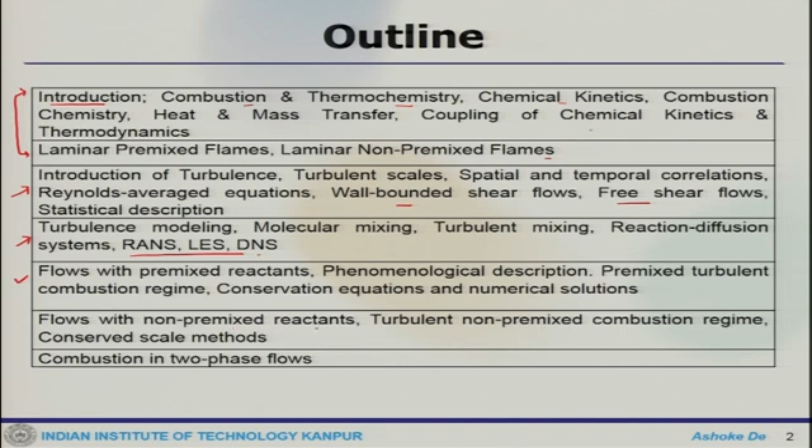We will look at some basic aspects of turbulent combustion, then move to premixed flames, then non-premixed flames, and see how different aspects of premixed and non-premixed flames are modeled based on their theoretical basis. At the end we will touch upon some advanced topics, or topics in two phase flows, or combustion in two phase flows, which are quite different.

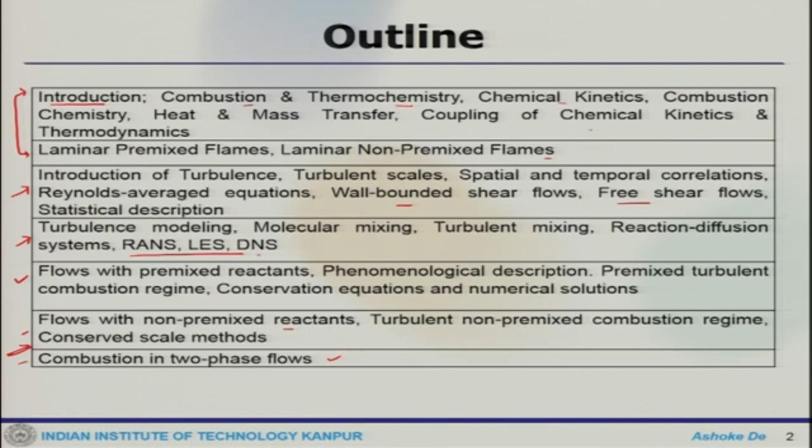Up to this point we are discussing everything in the gaseous combustion mode, and then we move to the last topic where we will talk about two phase flows or combustion in two phase flows, where sprays, atomizations and all this would be discussed.

Some of the materials covered in this course are taken from different references, and wherever possible we are giving the reference where it is taken from. One is also free to read any other books. First two books are essentially on turbulence, then there are books on combustion and turbulent combustion, and some online lectures were also looked at for different aspects of this.

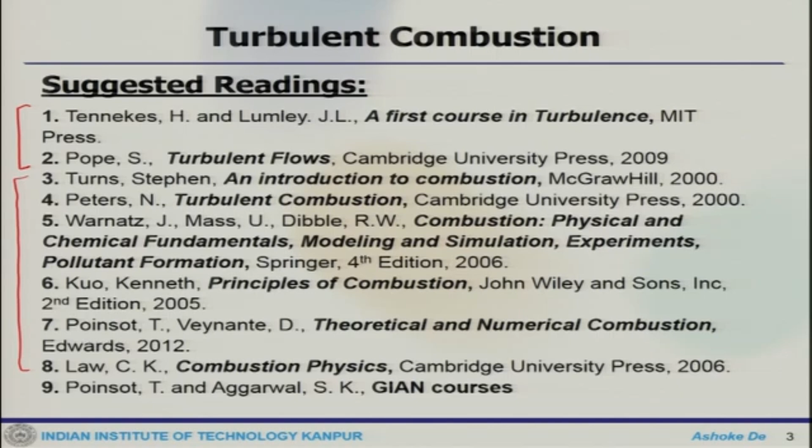This will actually talk about the complete aspect of turbulent combustion, and at the end of the course I hope you will have enough idea about turbulent combustion, how the basics of turbulence and turbulent combustion are connected with each other, and their modeling aspects.

Okay, so now we will start with the basics of combustion.

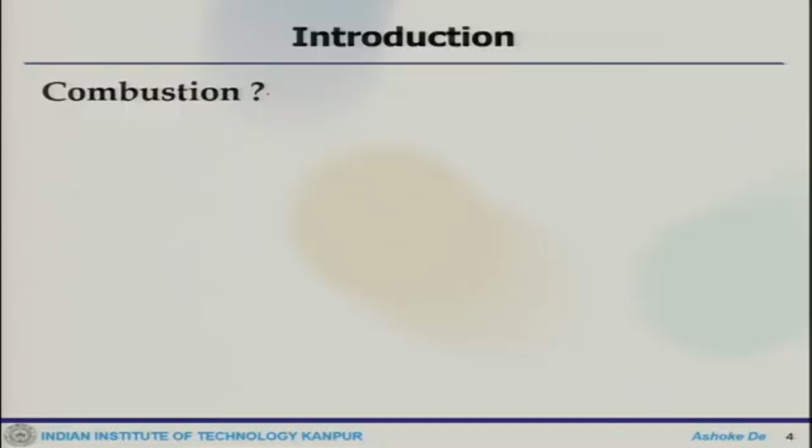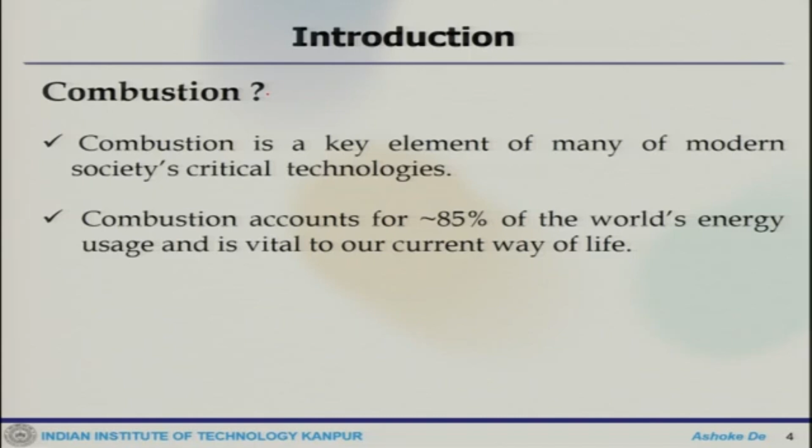So, basics of combustion - what is combustion? That is the first question one may ask. So, combustion essentially, one can think about it as a key element of all modern day or modern society's critical technologies. Because it accounts for approximately 85% of the world's energy use at this moment. So, it is quite important to know what combustion is, how it takes place, and what are the different challenges, and how it actually impacts our daily life.

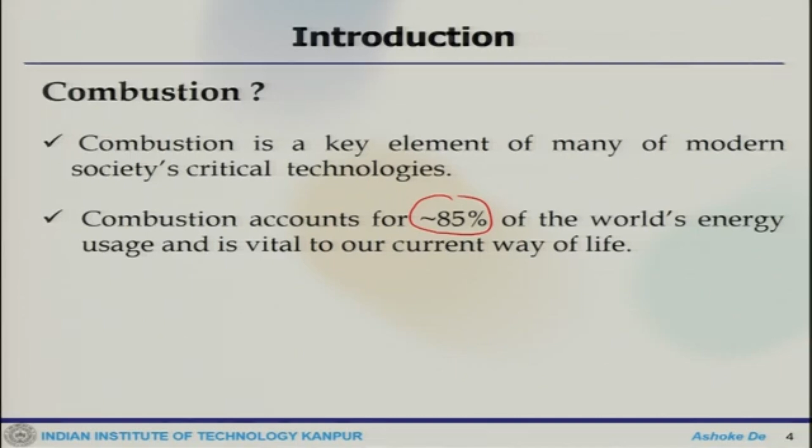And if you think about it from the application point of view, it starts from our daily life, like when we start cooking at our kitchen with gas burners, to our space missions. So, it is a wide range of applications it has, and that is why it is a key component of our daily life even today.

So, you can see spacecraft and aircraft propulsion. Spacecraft means when we talk about launching vehicles like rockets, missiles and all these things. Then aircraft propulsion, which covers both aviation aircraft, civilian aircraft and fighter aircraft. Then you have power production - when you go to the power plant, there is also a huge application of combustion, and we will see as we go along with this the different aspects of combustion and discuss all these details.

Then household application, transportation and different aspects of this. So the whole idea is the conversion of chemical energy to thermal energy or propulsive force. This is the key element of any combustion.

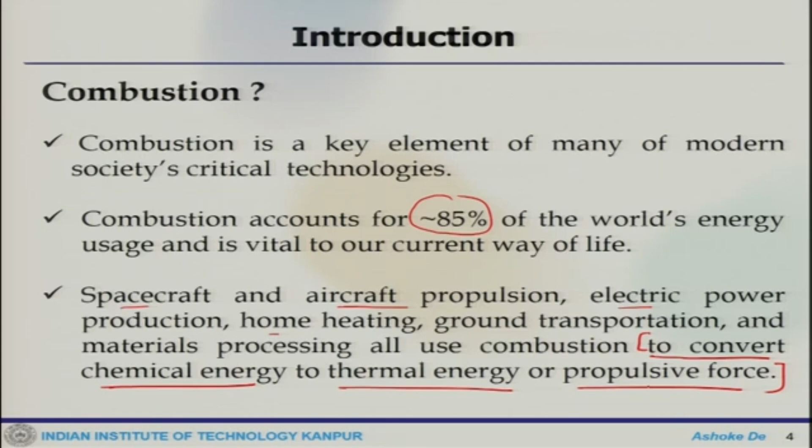Now, as I mentioned, there are different aspects of combustion or different applications. Starting from rocket propulsion, you have gas turbines and jet engines. Here, gas turbine could mean our land-based gas turbine, which is used basically for power production - in the power plant. At the same time, jet engines or aircraft engines also use gas turbines, but the principle of operation is slightly different from each other, and also the kind of fuel they are using. Then you have piston engines.

This is applicable in the automobile sector. So clearly you can see that in daily life, running your 2-wheelers, 4-wheelers and heavy vehicles on the road, they are operated under piston engines. So the power which you generate for the automobile sector also comes from combustion.

So if you see the applicability, then you go to furnaces and boilers. This has an application in material processing industry, especially in the power plant where boilers are used, and also furnaces are used in steel plants and all these things.

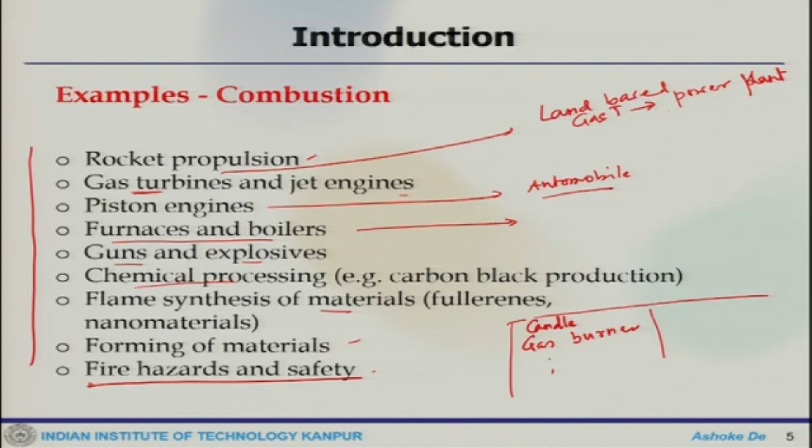One can see why we say that even today, 80-85% of the energy comes from combustion. Now I will take you through some nice examples that will give you an idea of the area of these applications, which is quite a range of applications that one can find for combustion.

This is starting from your gas turbine engine, the aircraft engine. That is the big engine, one can see it has so many components. There is a starting component which is the fan, then it comes to the compressor, then the compressor units, then you get the combustion unit, then turbine and finally nozzle.

There are multiple components associated with this particular unit, but the key element is the combustor, which actually generates the power, where you get your chemical energy transformed to get this propulsive force or thrust force. This force is essentially required to propel this particular engine.

Then you come to an application where you see a nice looking flame like a gas burner. It is nice, calm and nicely looking system.

But at the same time, if you come across here, this is a launching pad of a rocket engine. You see the kind of plume it generates, it is huge. It generates lot of power which sends these satellites to the orbit. That requires lot of power, and that is generated through this reaction mechanism or combustion, which in a nutshell is the reaction of different reactants or species, and they get you back the force.

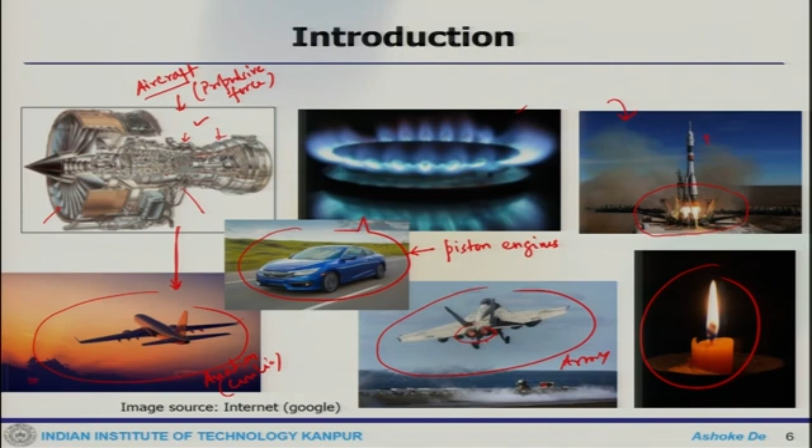And this is a nice example of your candle burning, which is daily life. When your electricity is not there, we can use this kind of burning, a nice calm flame that actually illuminates light. So one of the another aspect of combustion is that it also gets you some sort of light. As I mentioned, it accounts for almost 85% of the world's energy uses.

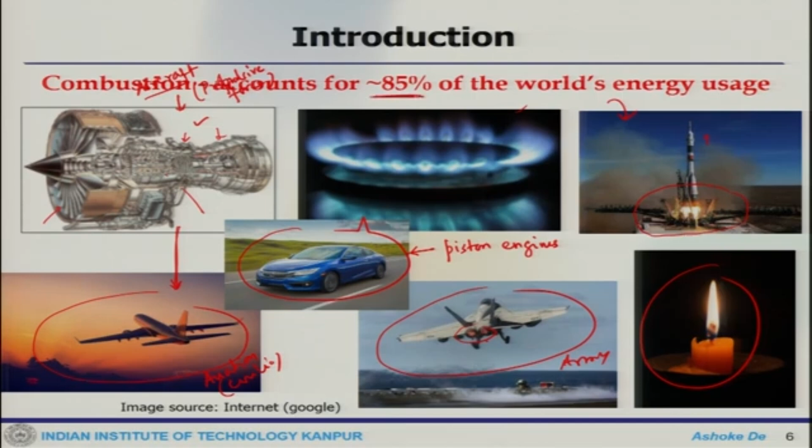Now there are some more examples one can see. This is another example of your gas turbine combustor. This is a very specific unit, just an example, because different gas turbine engines have different kinds of combustors, so their geometry would be different. But this one shows you there is a swirling vane there, then the fuel, liquid fuel, is injected. So this sort of flame you can see instantaneously.

This shows you a big satellite which is launched through the rocket motors, and see the amount of plume that is hitting the deck. So it's coming out as a product of combustion.

There is another thing which takes place in hot days, which is the fire that spreads out over wide range of forest areas when it is too hot. So this is another area where people are working on how to suppress this fire.

So essentially you can think about the area of applications of this combustion. There are wide range of applications, huge industrial implications, daily life applications. So it is everywhere, and that is what we keep on.

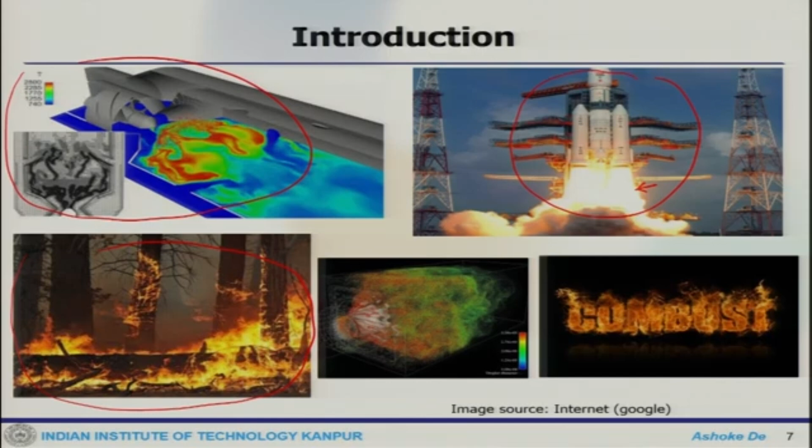That brings us to a very important equation. This equation is quite important in the sense that what is the source of energy on the earth today? This comes from combustion, and that is going to be the energy on earth tomorrow even.

There is a very key equation one should keep in mind, that even today the primary source of energy comes due to combustion. It is any form of combustion - it could be wood fire, burning of your stove, gas burner, or industrial level applications, and even tomorrow this is going to remain there. But what could be the fuel or something else, that is one has to look at.

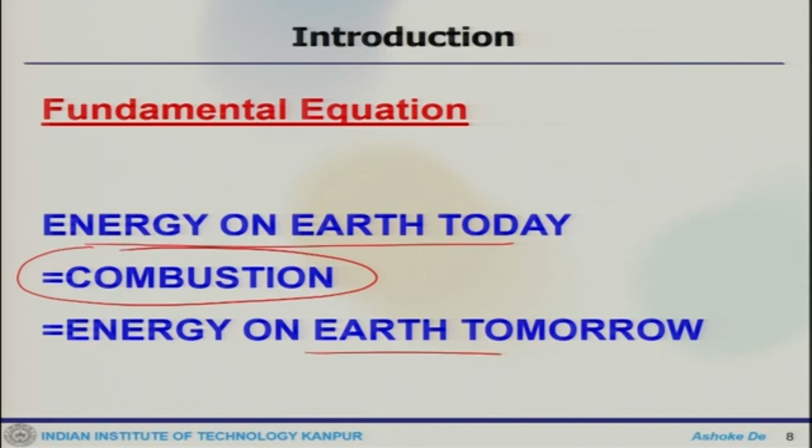Because with the growing demand of energy and all these things, people start thinking about alternative resources. One can see how previously, in earlier days, the primary source used to be coal, where the coal is burned and we used to get the energy. Then oil came in, then natural gas, but there is an increasing demand of energy along with the year.

This shows some sort of projection of how much carbon will be produced by the year 2030. One of the issues with this is that this produces lot of CO2 or CO. So that is essentially another problem of combustion - though combustion is an essential component of our daily life, it also has a huge impact in emission.

The combustion science should allow this without increasing the emission, wasting fossil fuels, or making climate change worse. So one can see, though the primary source of energy comes due to combustion, there are certain issues also.

Everything does not come free of cost. Combustion gives you energy, but at the same time it also emits lot of hazardous gases, the emission, and it also depletes fossil fuels. So these things also one has to keep under control.

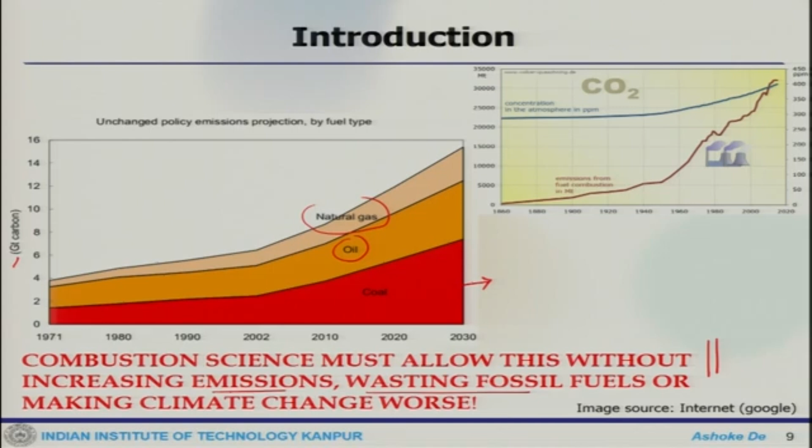So there lies the challenge - I want to use these things for the energy demand, to meet the energy demand, but at the same time. In a single sentence one can say combustion is the source of pollution, and these are the gamut of examples one can see where you can see the issues of combustion.

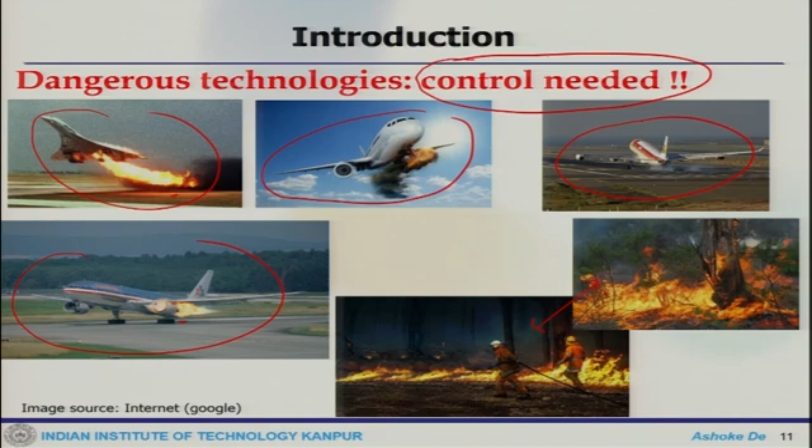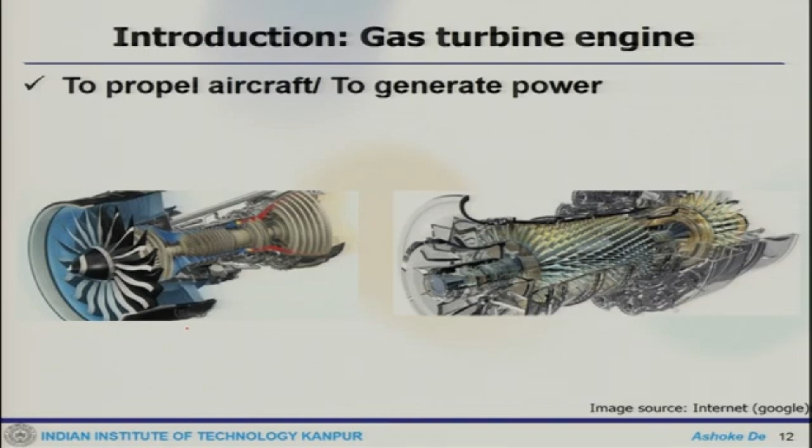So that is one of the important areas. Now take some example of the gas turbine, which is used in either land based units for power generation or for the aviation system. This usually generates the power to propel the aircraft, or it generates the power for your land based system.

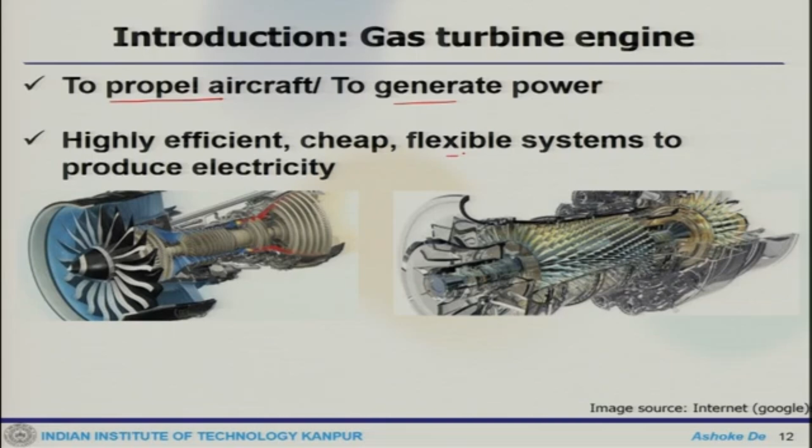And what is important here is that these gas turbine engines are highly efficient, cheap, and flexible systems to produce electricity. Now with the growing gas turbine markets, the regulation norms become really tougher - the emission norms are getting tough and tough every day.

So what is required is that one has to optimize this, because this industry is going to be there and you require these gas turbine units, whether for power production or for propelling an aircraft engine. So what's important is that you need to maintain the regulation norms, and this is becoming really stringent. One has to look at the emission and all these things.

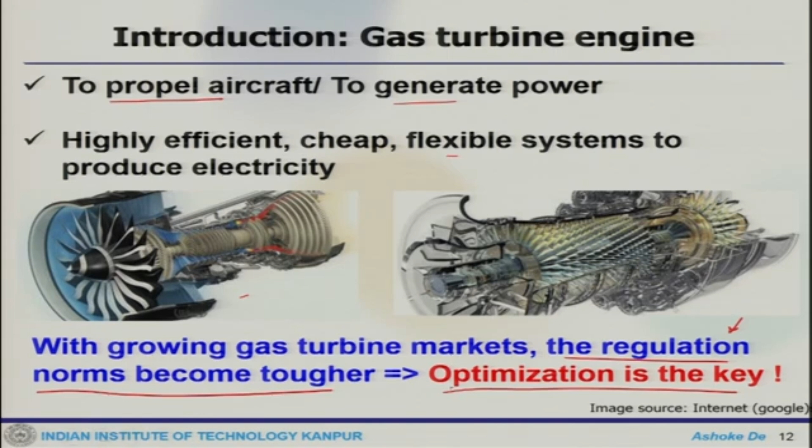So not only the control, at the same time you need to have the optimization. Optimization, if you look at it, is quite difficult, because when you go to optimize the emission, there will be a low NOx combustor, which will also become unstable - that means it will lead to some sort of thermoacoustic instability.

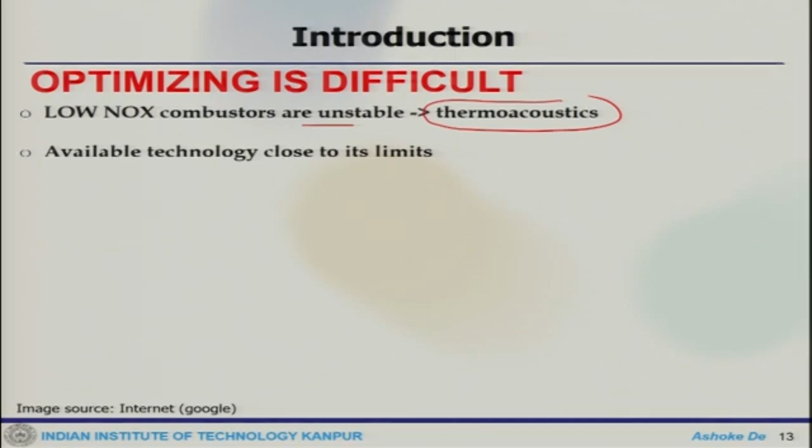Then whatever is the available technology as of today, they are sort of running close to its limits. Now, new possible designs cannot be tested due to high experimental cost. You may have a lot of different kinds of designs which could be efficient or optimized, but that cannot be tested because the manufacturing, fabrication and testing costs are quite high.

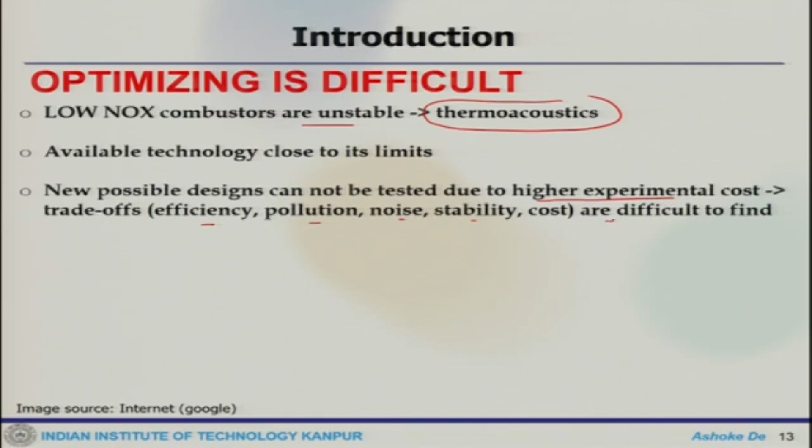So there has to be a trade off - in terms of efficiency or emission, noise or stability. These are some of the key parameters one needs to look at to make a decision, but that is quite difficult.

So CFD here, the importance of CFD becomes quite important, because it will get you an optimized system, and that can be handy. It does not require too much cost associated with it, and you can really optimize the system with low turnaround time. And once you do that, then you can come up with a new design or something like that.